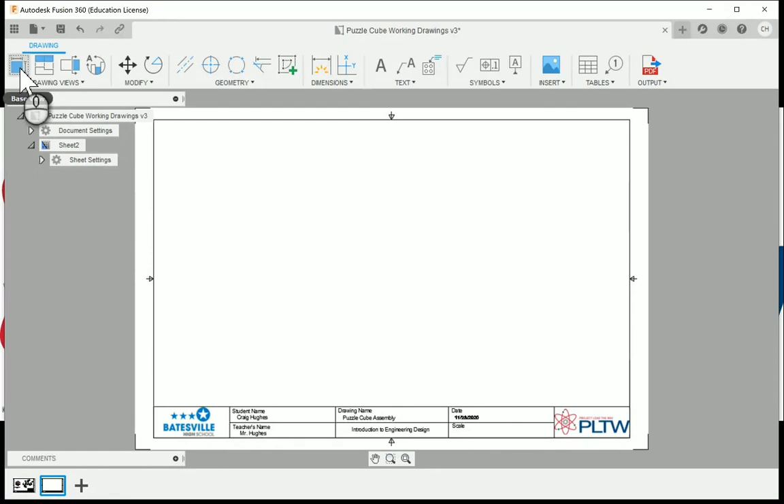So what I'm going to do now is go down here to the bottom left corner of my screen, and click the plus sign to add a new sheet to our drawing. I'm going to click on base view, and in order to create our individual parts, I'm still going to be using here our assembled cube.

I'm going to change the scale to 1:1, which is what we want here. I'm going to choose the front, and make sure I'm on the visible and hidden edges, and click to place the front view on the drawing.

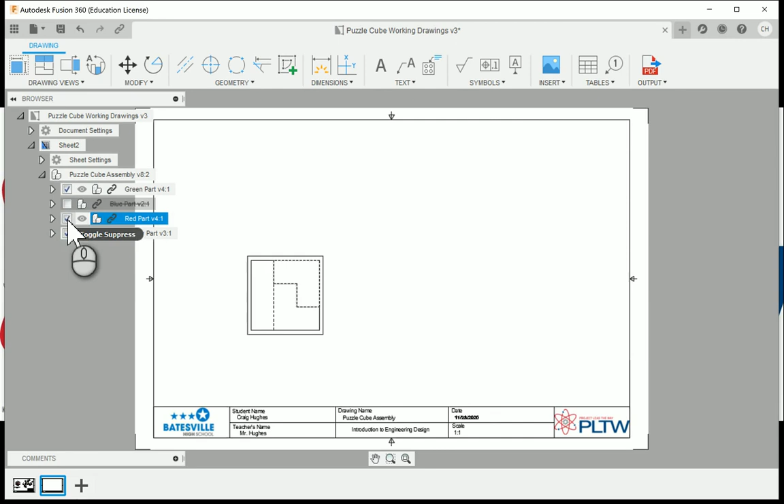Now you're going to notice here in your browser we're referencing the puzzle cube assembly, and we've got green part, blue part, red, and yellow. So I'm going to uncheck these little toggles, and uncheck all but the green part. This is where we're just going to showcase on this drawing just the green part.

I'm going to go ahead and click projected view. I'm going to do the top view, right side view, and the isometric. Shade the isometric, just like how we've been doing.

And now I can go ahead and start to dimension the drawing as I need. As per what we've learned, I'm going to go through and place dimensions as needed.

So here, on my width dimensions, I've got 1, 2, 3, 4 width lines. So I'm going to subtract 1. I'm going to need 3, and I need to place the overall height, or the overall width, excuse me, as well as the overall height and the overall depth.

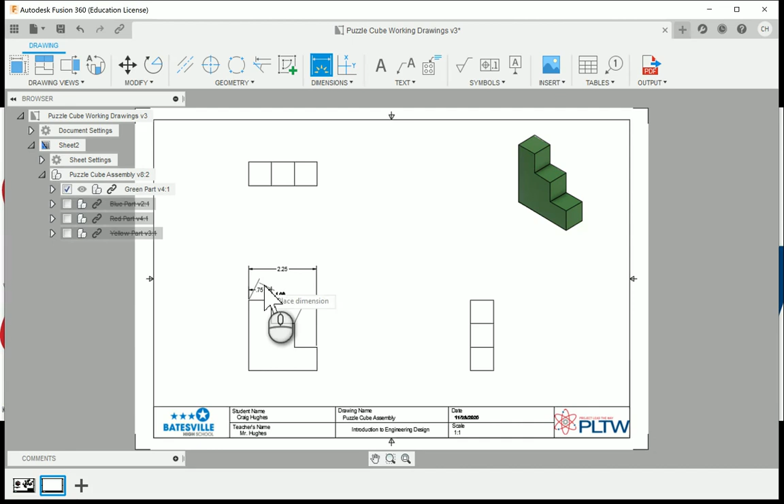But width-wise, I do need some other dimensions here to make that happen. This is going to kind of run right through, so let me try just clicking from this corner to this corner, and I'll set one right here.

And if I need, I can go through and hit escape and kind of drag these up so that way they're a little bit in line together. Makes it look a little neater.

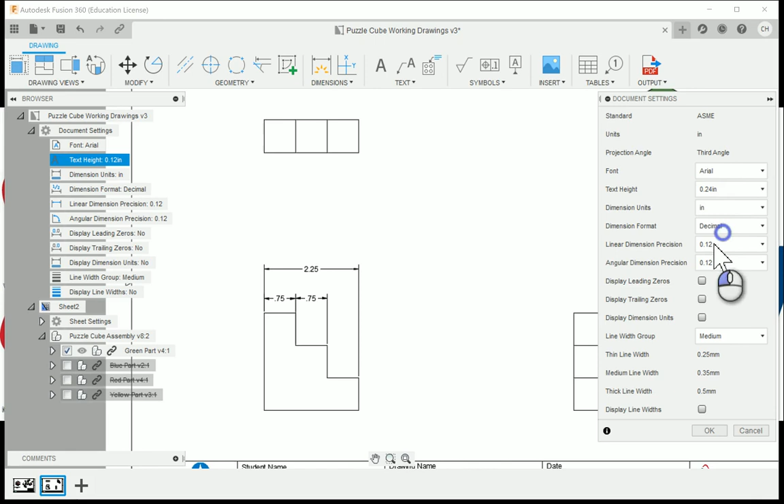Under my document settings, let's look and see at the text height. So this looks a little small. Maybe we should change that to 0.24 and see what happens. That looks a little bit appropriate.

So as we go along, I could probably boost the scale up a little bit. 2:1 may be a little bit too big. We'll see, so maybe I go through and do a 1.5:1 scale. And that looks like those fill the page just a little bit better.

Not as much white space. And if we set those dimensions, that kind of helps make them look a little bit more appropriate.

Alright, so here I've got my 3 width dimensions. Let me put my height over here so I don't cross extension lines. But I'm going to go through and look at doing some height dimensions.

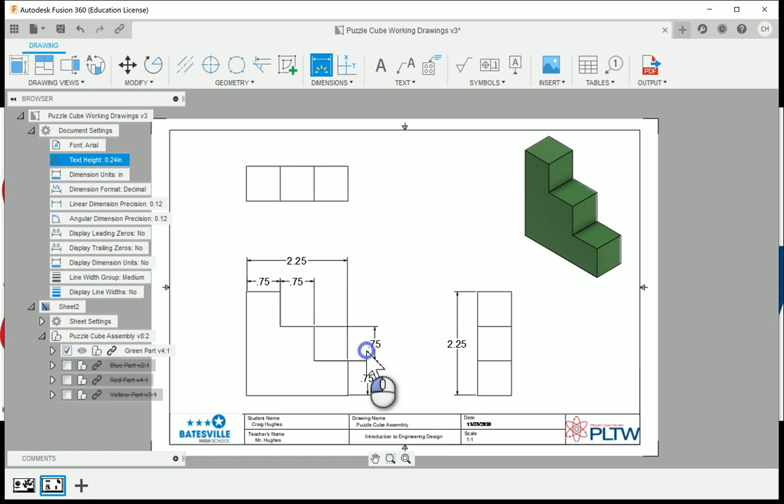So here I've got this one and this one. And then maybe I need this one to here. So I need 3 height dimensions for this because I count 1, 2, 3, 4 horizontal lines, subtract 1. For my depth, I need 1, 2, so I only need 1 depth dimension.

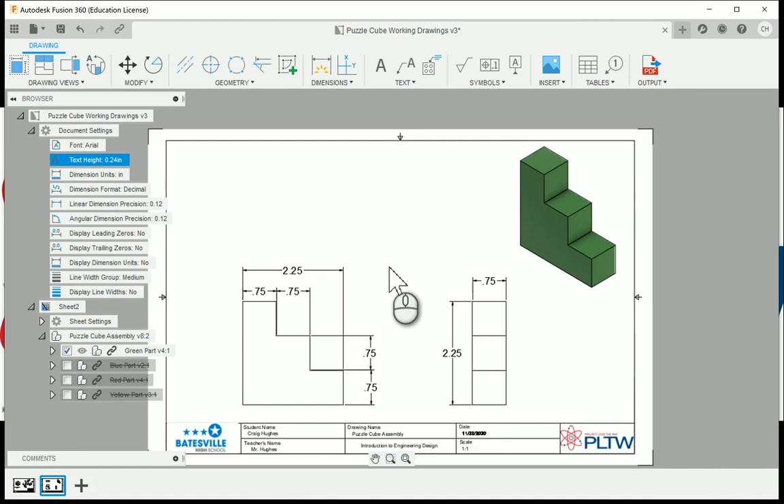And as noted, if we've got a drawing that doesn't have dimensions on it, or a view I should say, I can go ahead and get rid of that. But this will go through and finish out this view. So we've got all the dimensions necessary as noted by our dimensioning flowchart and guidelines.

And then I can go ahead, and when I'm ready for a new drawing, click the plus sign, add my next base view.

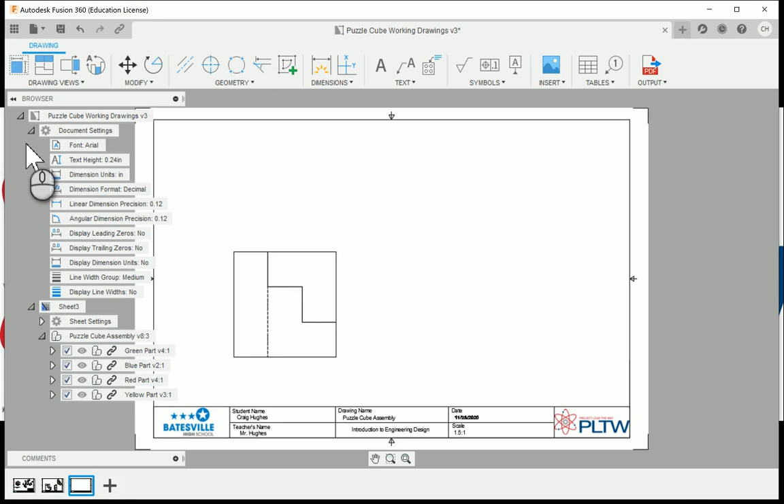So I'm going to set this to the 1.5 to 1 scale, visible and hidden edges. Let me place the front view and say OK. Now let me collapse the document settings.

I'm now going to go through and put just the blue part. The blue part looks like this, so maybe I want to go through and choose a better front view. Let me pull this out. Maybe I look at the right side, which is giving us the most amount of the part, and that's exactly what I want.

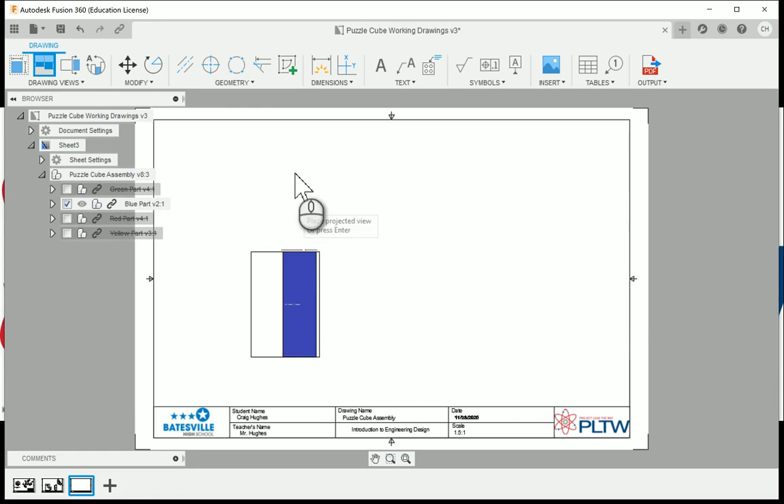Again, visible and hidden edges are checked. This one here is a fairly simple part. Let me project the front and the right, or the top and the right, and the isometric.

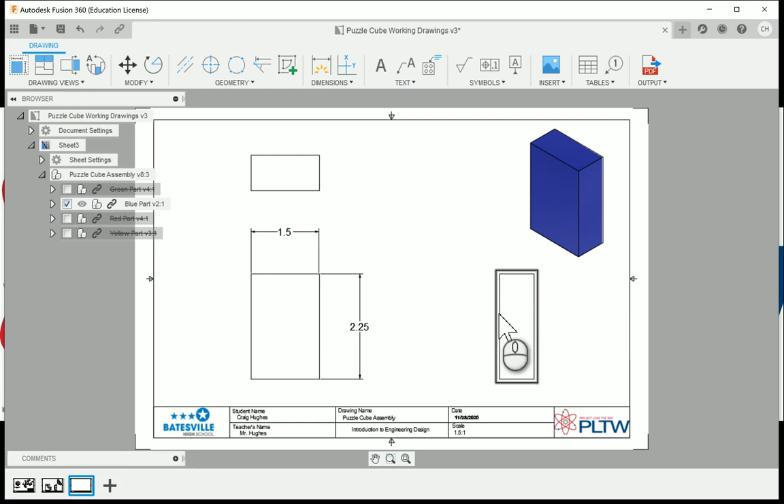And then now as I take a look at dimensions, I need... that's really all that I need. So I can go ahead and keep these other views so it looks good. Actually, I do need a depth. So I could go through and get rid of my top view again. If you ever have views that don't have a dimension, you can always get rid of those.

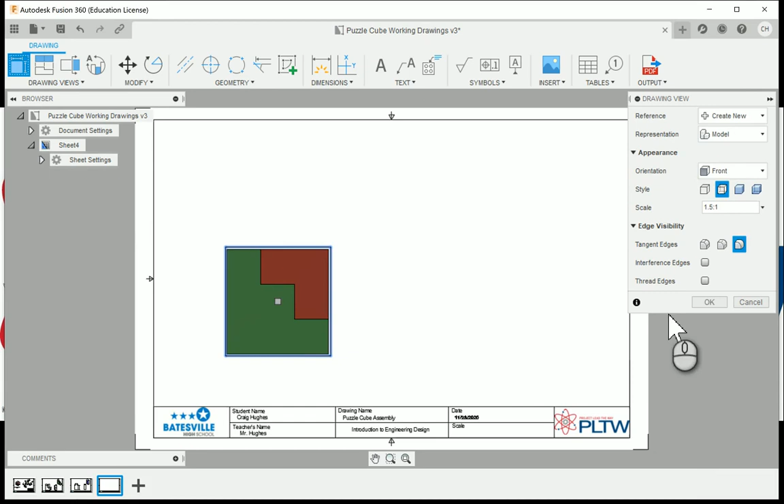Okay, new drawing, base view. Again, I'm going to follow this exact same process. Let me change the scale up, visible and hidden edges. Let me place this view. Let me uncheck and do the red part this time.

So this is not a bad look for this part. Let me go ahead and project it. Shade the isometric.

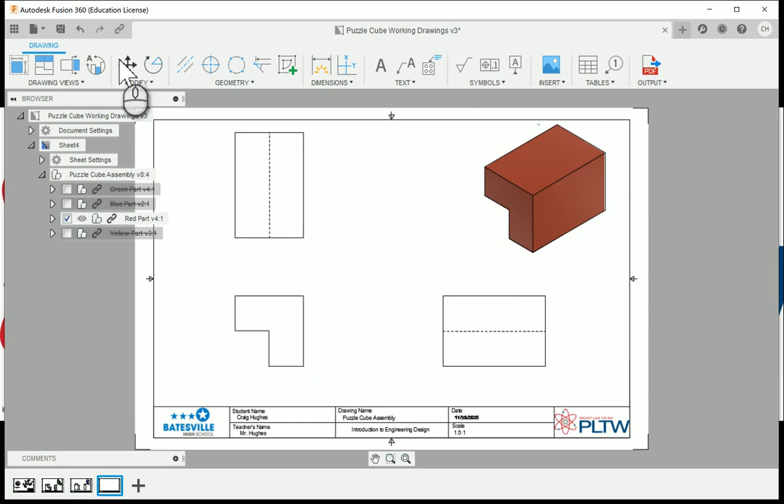This one here has a little bit going on, a bit more with some hidden edges and everything. Let me take a look at dimensioning. The width on this one is going to look like this. The height - this is one where the overall height could go here.

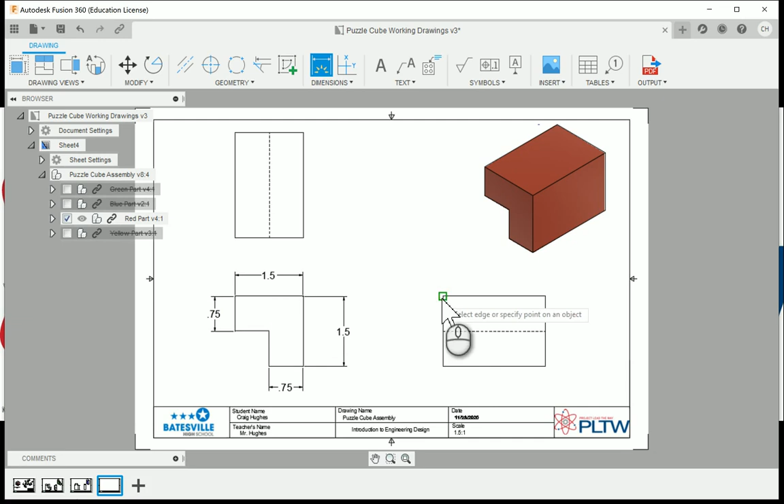And this is one where we may need to go put, for example, this one down here toward the bottom and this one here to the left, which is not always the best case scenario. Then maybe I'll put the depth off of the top view here to show the 2.25. But these are all the dimensions we needed to make the part.

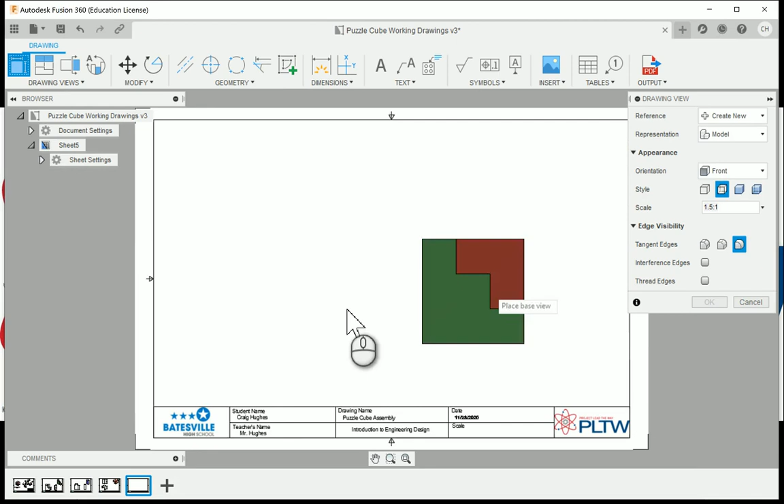Here, for example, I would need the right side view, and that would give me my part there. Last drawing, again following the same procedure: visible and hidden edges, 1.5 to 1 scale, place, uncheck everything but the last part that I need, project it,

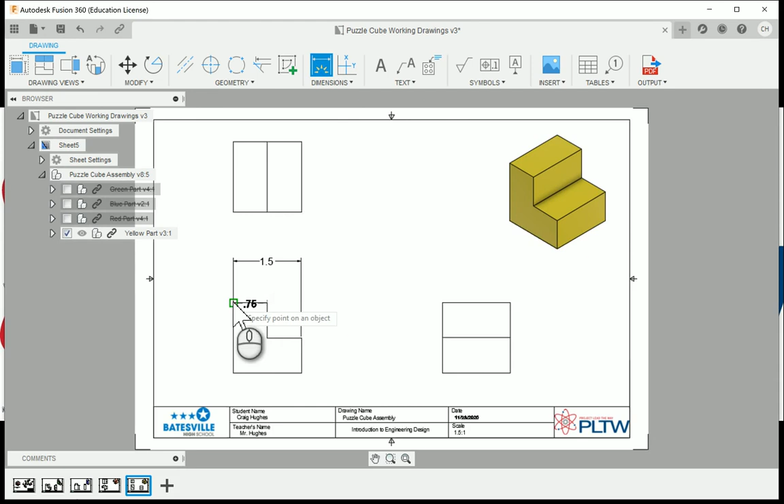start placing my dimensions, again according to dimensioning guidelines and by the number of appropriate dimensions that I need. So between adjacent views, it's always the big one.

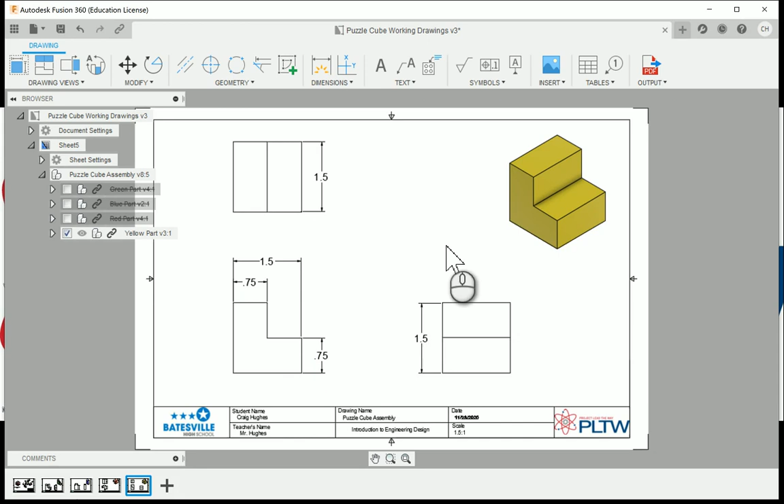So this would go through and require having all 3 views on it since I put dimensions on there. Could I put the depth over here and get rid of the top view? Probably could have - it just depends on the designer's preference. But right now we have all the drawings.

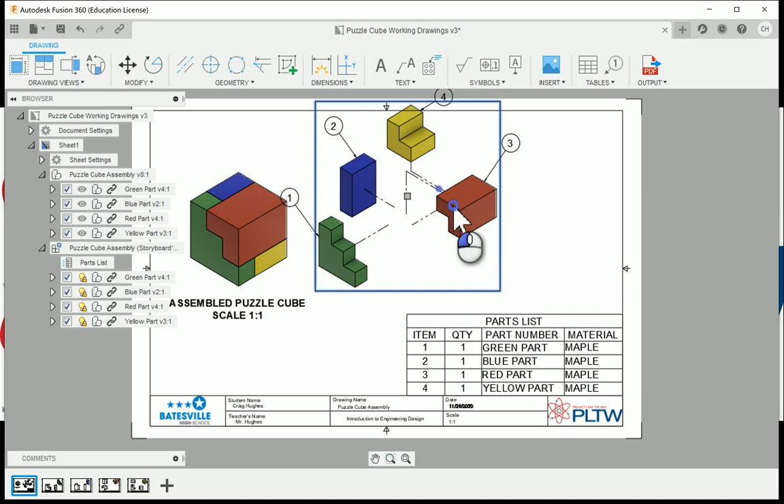Let me move this view out of the way. Let me see if I can place this right there. Stretch point - let me go up here just a little bit. There we go, it kind of snaps to the title block.

And then we can kind of move the view here a little bit. It's the exploded view. Let me move my balloon down so it's not in the border. And there we have our view repositioned.

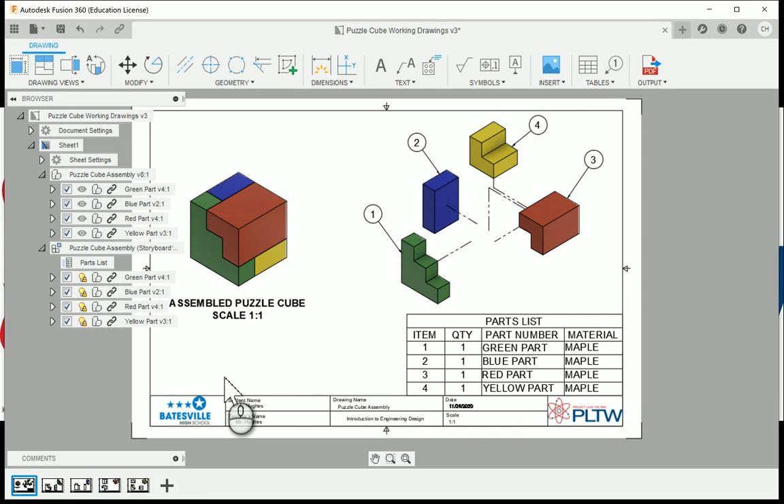All right, so this will finish out again looking at the drawings for this. And what you would do here is this finishes up everything for the Puzzle Cube documentation, export to PDF, and then submit.